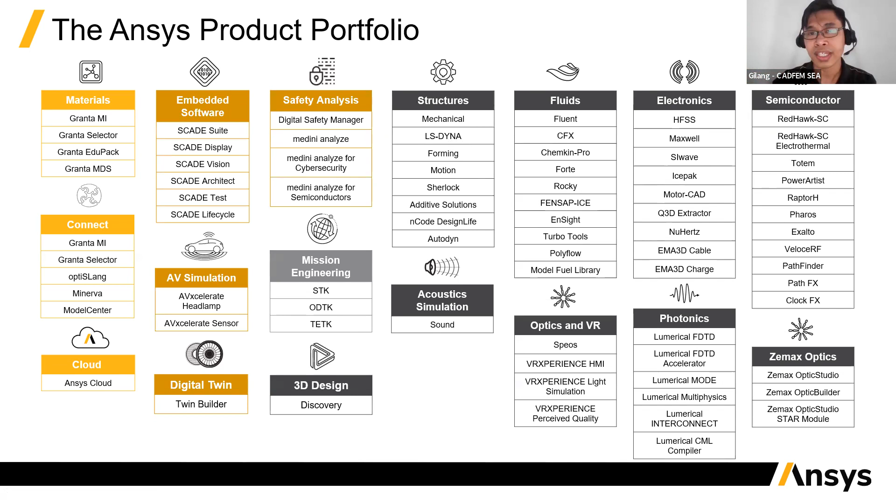Atau kita ingin fokus kepada impact, mobil kita tabrakan, bagaimana safety-nya. Atau seperti yang terakhir kita lakukan ke rekan-rekan di industri bis, untuk rollover, bagaimana kita melakukan analisa untuk rollover-nya. Kira-kira seperti itu, saya coba sedikit lebih detail.

Ini untuk ANSYS Granta. Jadi secara umum untuk lisensi ANSYS terbagi dua, Bapak-Bapak dan Ibu. Ada lisensi akademik, ada lisensi untuk komersial, di mana keduanya terbagi menjadi tergantung segmentasi penggunaannya. Karena memang ada yang hanya untuk level research atau untuk level edukasi saja, sehingga dari segi pricing-nya pun akan sangat jauh dibandingkan yang komersial.

Namun hal tersebut tidak bisa kita gunakan atau bawa ke ranah komersial atau ada tahap kerjasama dengan industri, di mana di bagian industri perlu ada penyesuaian dari sisi lisensinya untuk penggunaan di industri, sehingga ada pembagian proses lisensi seperti ini. Untuk yang komersial ada beberapa jenis: ada Granta MI, ada Granta Selector, dan ada Granta MDS. Sementara untuk yang edukasi, utamanya ada Granta EduPack, dan juga ada Granta Selector untuk yang akademik.

Nanti rekan saya dari teknikal akan coba memberikan presentasi secara demo teknis. Namun mohon izinkan saya untuk coba memberikan brief informasi terkait masalah semua solusi yang ada di ANSYS.

Selanjutnya, di sini ANSYS juga punya product collection seperti ANSYS Minerva, di mana misalkan Bapak melakukan simulasi itu biasanya tidak langsung satu kali jadi, Pak. Biasanya akan ada revisi 1, revisi 2, di mana kalau kita bikin revisi, biasanya kita akan save as, kita jadikan revisi 1, atau kemudian kita save as kembali, kita jadikan revisi kedua. Nah, dengan ANSYS Minerva, kita bisa lakukan scheduling yang pertama.

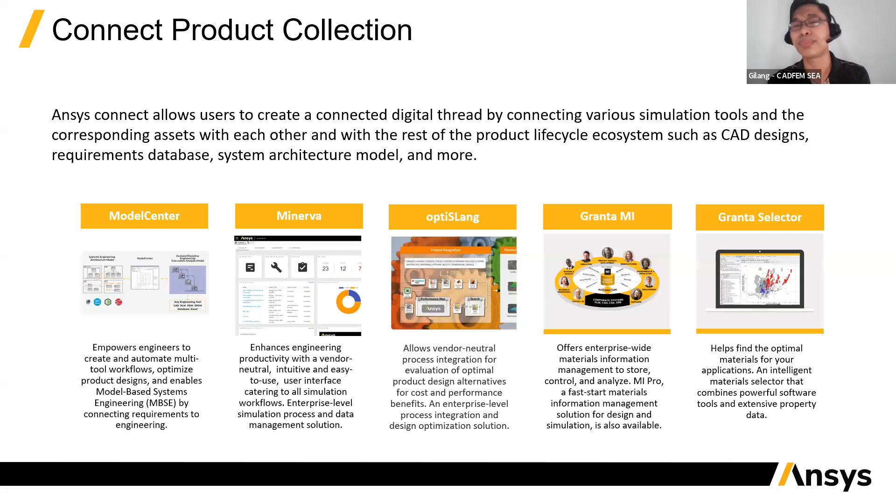Ada juga ANSYS Cloud yang tadi saya bilang, jadi rekan-rekan bisa mendapatkan high performance computing tanpa perlu menggunakan lisensi atau tanpa perlu menggunakan hardware yang rekan-rekan harus sediakan dulu. Cukup dengan akses internet saja dan juga akses token atau akses cloud yang misalkan kita punya. Jadi komputer power-nya itu unlimited, tinggal berapa jam saja yang kita punya untuk bisa akses ke ANSYS Cloud.

Lalu ada embedded software, di mana untuk rekan-rekan yang membuat sistem digitalisasi. Seperti kita buat flowchart, skematik, kemudian kita masuk ke dalam dunia virtual, di mana nantinya kita bisa replikasi beberapa adegan kejadian. Kemudian kita bisa tahu mana yang paling optimal.

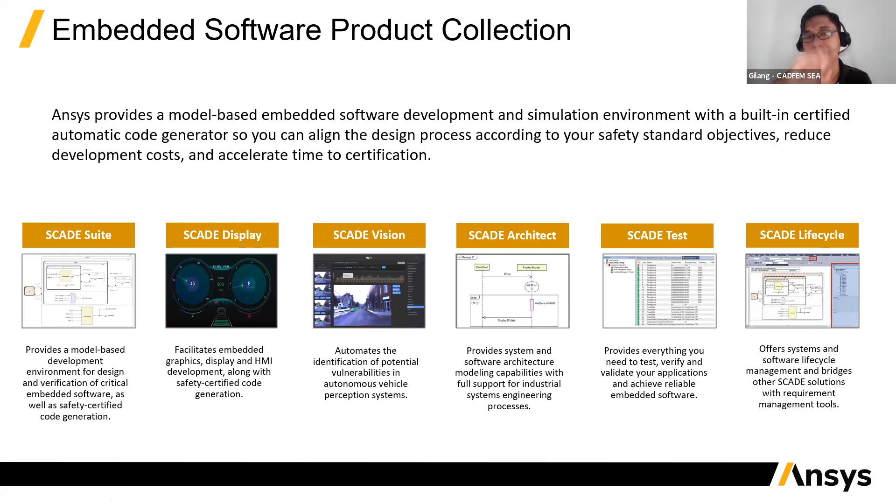Hingga juga misalkan proses electrical. Misalkan kita mendesain listrik, kemudian kita membuat skematiknya, lalu kita ingin melihat bagaimana sebenarnya sistem kelistrikan tersebut kalau kita jalankan.

Lalu juga ada autonomous vehicle seperti tadi. Bedanya, ini kita bisa langsung bikin seperti ada satu kota, seperti yang terakhir saya presentasi bersama rekan-rekan di Jakarta Smart City. Jadi kami ingin mencoba membuat city lebih smart, tidak hanya untuk autonomous vehicle-nya, tapi juga misalkan kita analisa banjir, kita analisa kekuatan angin, apakah akan ada puting beliung dan segala macamnya.

Sampai ke dalam sana pun ANSYS bisa melakukan analisanya. Jadi tidak hanya sekedar menganalisa apakah nanti gempa bumi tersebut ketika terjadi bangunannya hancur atau tidak, atau ketika ada bom meledak kemudian bangunan tersebut hancur atau tidak. Tidak hanya sampai sana saja, tapi sampai ke analisa banjir, itu juga bisa kita coba simulasikan di ANSYS.

Ini juga termasuk yang tadi, namanya digital twin. Jadi semuanya itu termasuk ke dalam product summary-nya di digital twin.

Lalu ada untuk safety-nya juga, di mana kita lebih ke mengatur sistematis pekerjaan, antar scheduling, atau sistem manajerial untuk mengerjakan proyek supaya jadi lebih efisien. Sehingga kalau Bapak punya misalkan jurusan yang bersifat manajemen, seperti misalkan kita menerapkan ISO 26262, itu lebih ke safety atau ke manajemen safety, itu kita bisa menerapkan program-program yang ada di dalam ANSYS, kita satukan ke sana untuk kita buatkan flowchart dan akhirnya kita bisa assign ke orang tertentu.

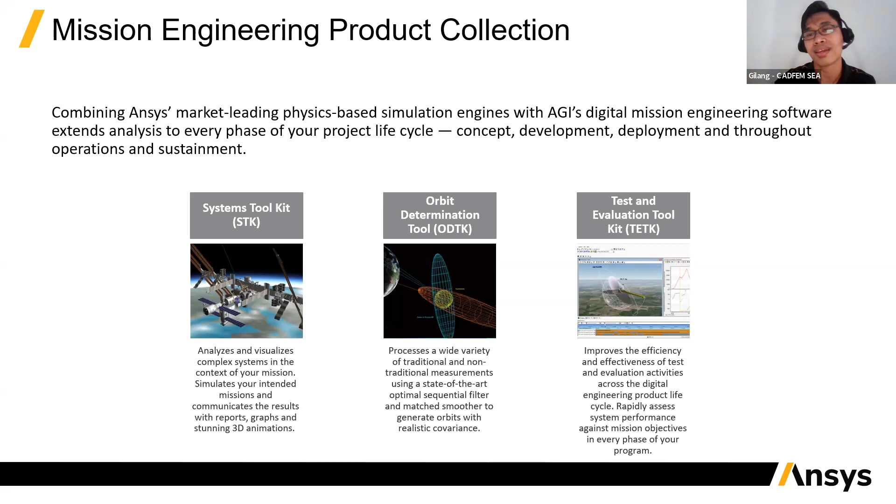Nah, ada juga untuk 3D produknya. Jadi di ANSYS juga ada 3D CAD-nya, ada juga untuk level desainernya. Kita namakan Discovery. Ini berbeda dengan ANSYS Mechanical atau ANSYS CFD pada umumnya. Ruang lingkupnya lebih kecil, namun lebih cepat dan lebih mudah untuk dioperasikan.

Karena kita tidak perlu banyak parameter seperti halnya kita melakukan analisa di ANSYS produk pada umumnya, karena memang levelnya atau targetnya itu ke lebih level designer. Seperti kalau Bapak pernah mencoba SolidWorks, Inventor. Nah, ini adalah sebagai head-to-head-nya dengan mereka.

Namun tidak bisa lebih expert, misalkan ada 2 phase atau 3 phase, atau 3 fasa udara yang kita masukkan, atau misalkan ada beberapa parameter yang lebih kompleks kita masukkan ke dalamnya, tidak bisa. Jadi ada yang namanya ANSYS Discovery di dalamnya.

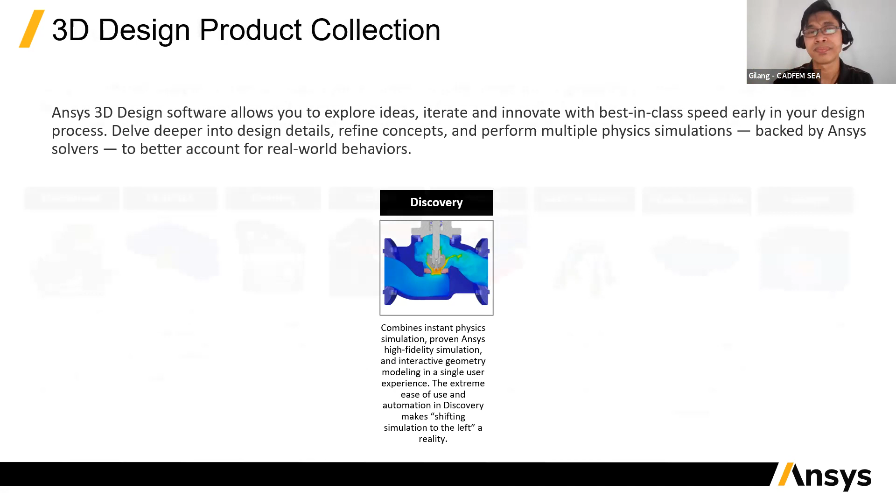Nah, kemudian untuk yang structure, mungkin rekan-rekan sudah mengenalnya. Jadi di ANSYS Finite Element Analysis, itu ada ANSYS Mechanical, ada juga ANSYS LS-DYNA, di mana di LS-DYNA ini lebih terkenal ke eksplisitnya. Seperti misalkan pengurangan material, di mana tidak semua software analisa bisa melakukan proses tersebut.

Contoh misalkan drop test yang memang sangat detail. Atau peluru kita coba lepaskan bagaimana proses peluru tersebut menghancurkan satu benda. Atau misalkan mobil kita tabrakan. Itu juga tidak bisa kita miliki kalau software tersebut tidak memiliki solver bersifat eksplisit.

Yang baru juga ada ANSYS Forming. Mungkin kalau rekan-rekan tahu proses stamping die, atau pembuatan bodi mobil, pintu mobil itu dengan stamping atau dengan press tool. Nah, ANSYS juga ada software untuk menganalisa kerutan dan juga proses analisa spring back pada saat stamping tersebut dilakukan.

Hingga ke motion, contoh mobil kita jalankan, bagaimana roda gigi atau puli dan juga belt itu berjalan, kekuatannya bagaimana, atau kalau dalam kasus contoh yang saya beri lihat, ada ekskavator, bagaimana hidrolik tersebut menggerakkan si lengannya dan juga menarik si bucketnya, apakah nilai dari hidrolik atau nilai dari struktur yang kita lakukan itu kuat atau tidak, ataupun pumpingnya itu kuat atau tidak.

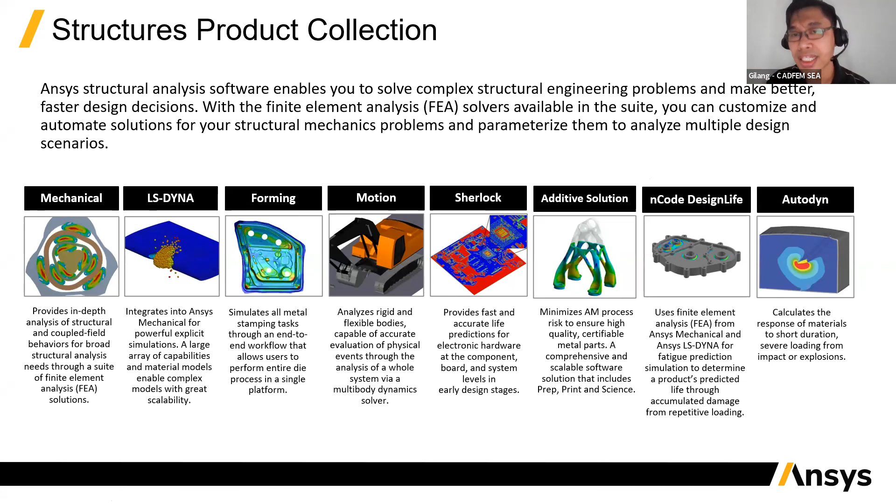Jika memang nanti ada pertanyaan, mohon bisa diketikkan di chat atau bisa potong saya saja, misalkan mau tanya langsung di poin tersebut, tidak apa-apa. Lalu juga ada acoustic simulation yang tadi saya bilang, misalkan ada vibration. Kemudian bagaimana internal natural frequencies tersebut terpengaruh atau tidak sehingga akhirnya ikut bergetar atau tidak dari benda tersebut. Contoh misalkan motor lagi berjalan, mesinnya bergetar.

Kemudian apakah di bagian joknya ikut-ikutan bergetar juga atau mungkin ada peredaman yang bisa kita lakukan di sana sehingga efisiensinya lebih terjadi. Lalu yang paling powerful dari ANSYS itu di bagian fluid atau CFD, Pak, di mana orang banyak kenal ANSYS Fluent. Kalau sekarang sudah tidak ada ANSYS Fluent namanya, Pak, kalau di ANSYS sudah berubah jadi ANSYS CFD. Jadi di dalam ANSYS CFD itu sudah ada ANSYS Fluent, dan juga include ANSYS CFX. CFX ini memang untuk seperti kayak benda yang berputar, Pak, rotational machine.

Lalu ada Chemkin Pro. Chemkin Pro ini untuk penyatuan chemical, Pak, chemical 1 dan chemical 2 kita coba mixing jadinya seperti apa. Forte itu lebih ke pembakaran. Misalkan kita jalankan mobil, bagaimana proses pembakaran pada motor bakarnya.

Lalu yang lagi ngetrend sekarang tuh ANSYS Rocky, Pak. Di mana ANSYS Rocky ini sebenarnya hal yang memang miss dari ANSYS, yaitu di daerah discrete element method, komponen-komponen yang sifatnya intangible seperti misalkan powder atau bubuk, biji besi, kemudian juga pada saat pengeringan jagung, batu bara, kemudian material-material yang memang bisa hancur. Misalkan pada saat dia berjalan, kita coba putar, kemudian ada perpecahan dari material tersebut, itu kita bisa analisa di Rocky.

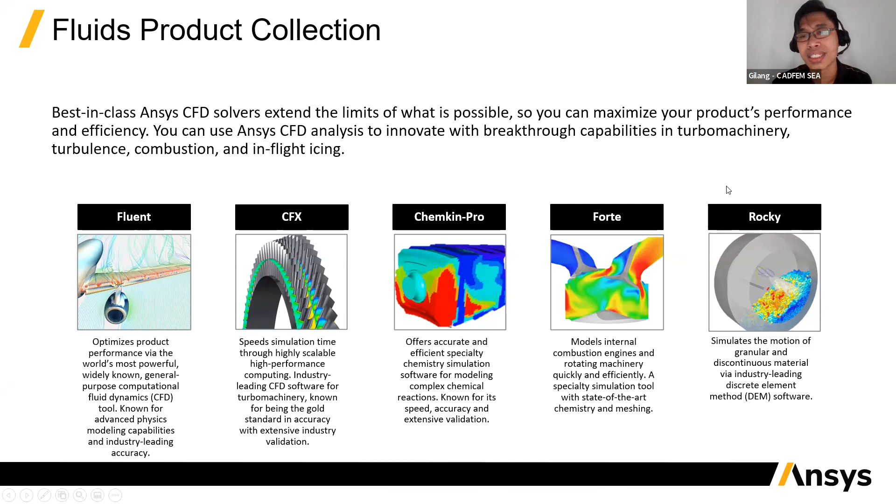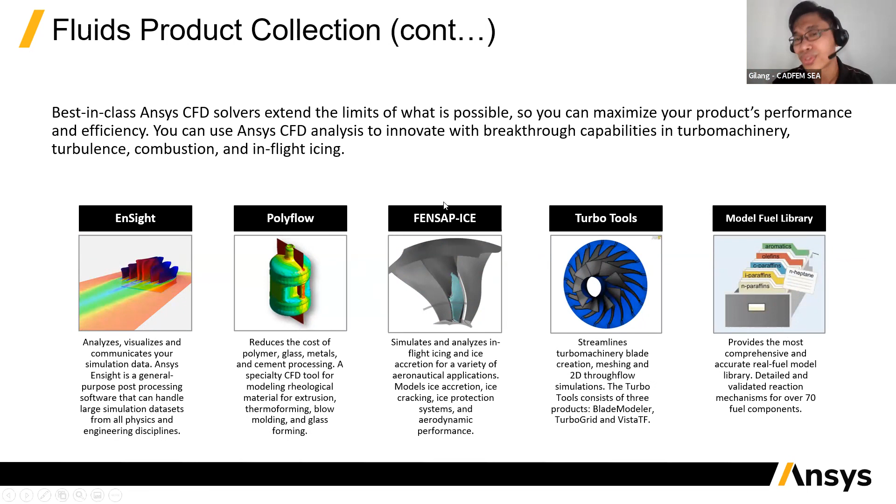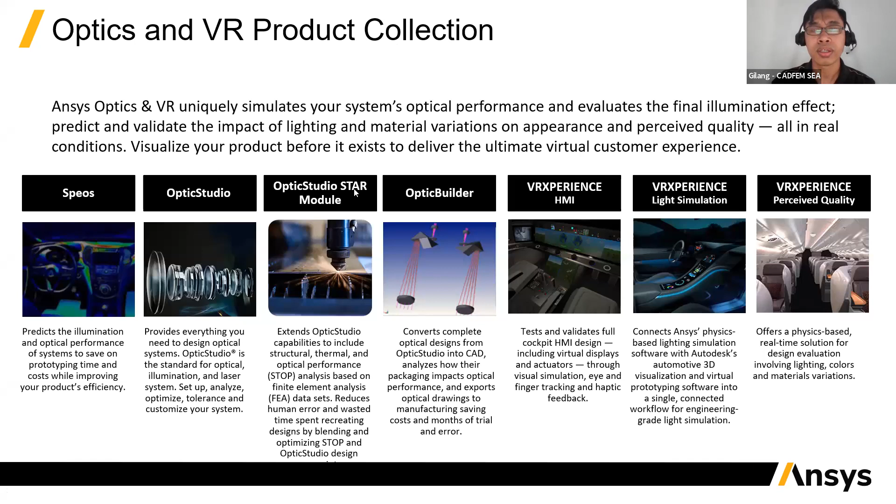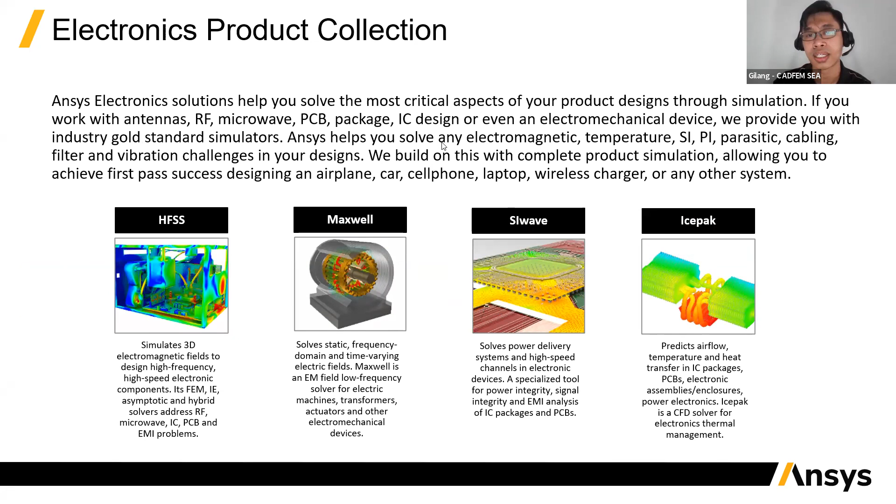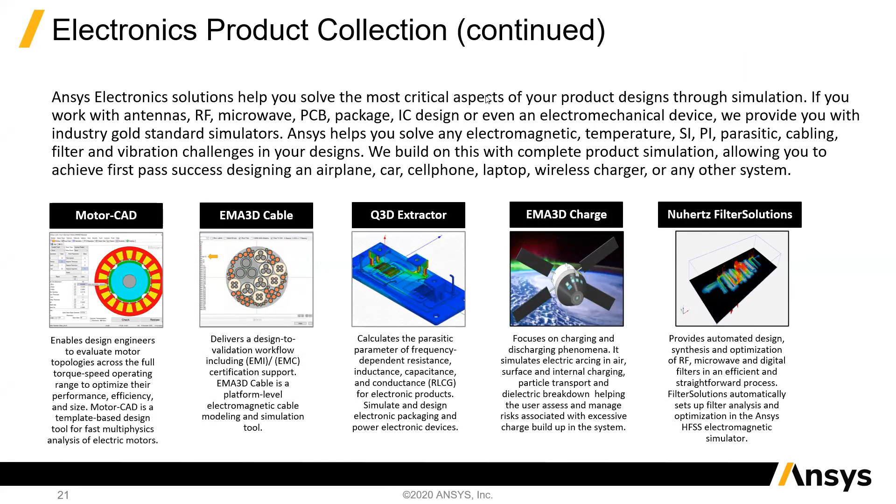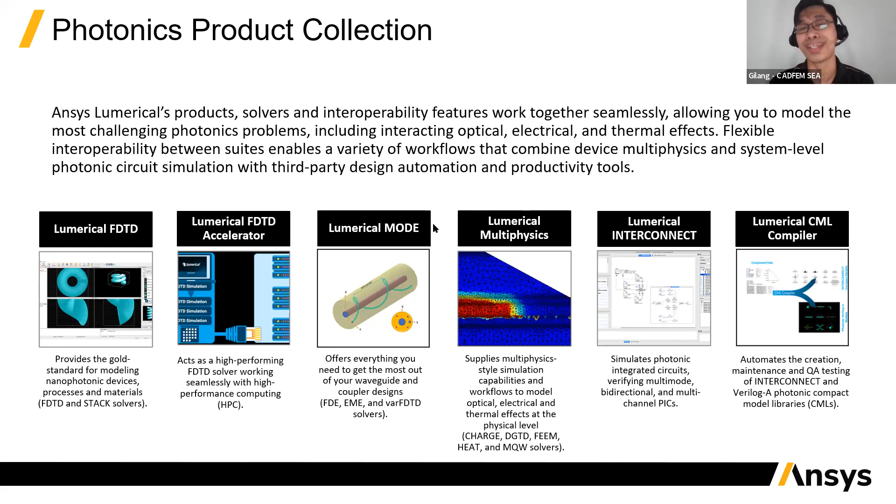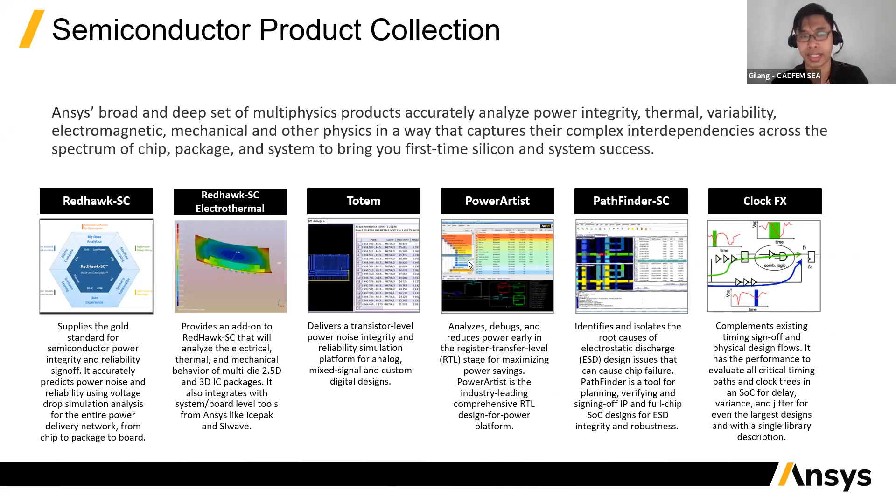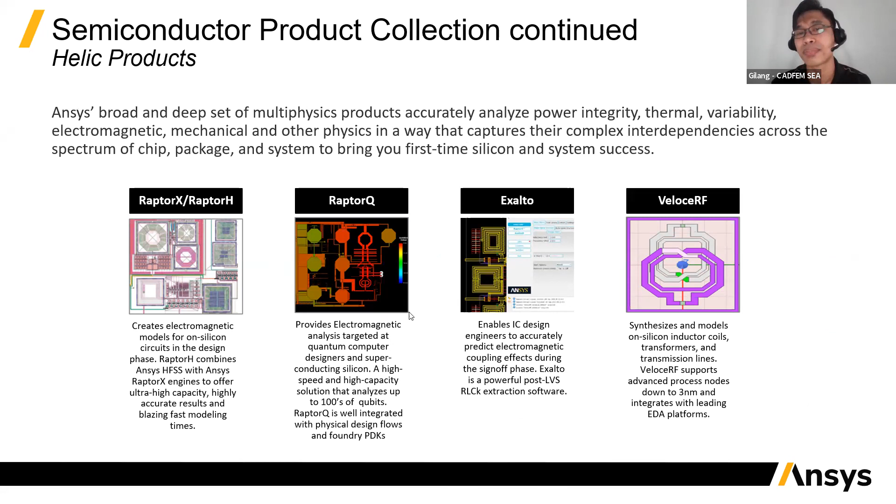Ada semiconductor juga, jadi kalau Bapak desain sistem seperti ini, itu juga bisa kita terapkan dengan ANSYS, seperti namanya ANSYS RedHawk dan juga yang lainnya. Ada Raptor juga, Pak, di sini untuk Helic product, tergantung memang dari jurusannya juga. Kalau misalkan nanti ada yang ingin ditanyakan terkait desain IC, atau power untuk elektromagnetik, itu kita bisa masuk ke dalam semiconductor area di ANSYS.

Kira-kira dari saya seperti itu, kita akan coba mengerucut ke arah ANSYS Granta, dan nanti akan dipresentasikan sama rekan teknikal saya, dan juga nanti kalau sempat akan didemonstrasikan secara teknis. Sampai sini dulu, mungkin dari rekan-rekan ada pertanyaan, silahkan. Tidak ada? Aman semua?

Saya Aman? Boleh, Pak? Boleh, Pak. Silakan, Pak.

Hanya ingin bertanya, nama Syarif Inamul Jawad, dari mahasiswa Tirta. Kalau yang saya baca di website terbarunya ANSYS, ada mengeluarkan produk baru ANSYS 2022 R1.

Yang sebelumnya saya pernah pakai untuk penelitian itu ANSYS 2021 R1. Jadi ada yang 2021 sama yang terbaru 2022. Nah, dari situ, penelitian saya kan tentang carbon nanotube, Pak.

Menurut Bapak, saya melakukan penelitiannya itu lebih baik prepare untuk software yang mana, Pak, yang lebih mantap untuk 2022 atau yang lama? Saya juga ingin tahu apa perbedaannya, Pak. Perbedaan dari dua software itu, yang terbaru sama yang lama.

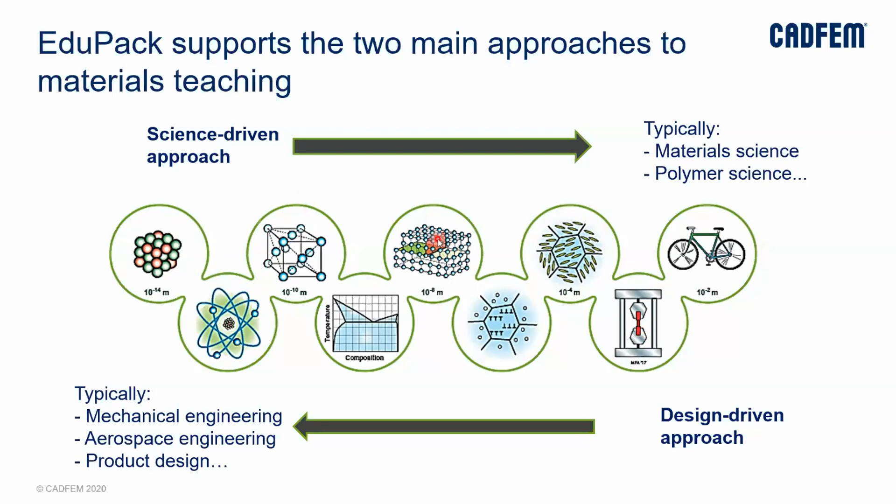For mechanical engineering, aerospace engineering, or product design courses, generally the focus is on what is the final product and what should be the expected material properties, like the expected mechanical properties, and how do we choose the materials accordingly. So these two approaches are handled very well by the Granta EduPack interface.

When it comes to which departments can use EduPack, it's not only restricted to mechanical and aerospace engineering, but there are different databases available for civil related departments, architecture departments, bioengineering departments, manufacturing, material science, and eco design. So there are many databases addressing each of these aspects, taking into account eco properties like carbon footprint and energy consumption for manufacturing, and sustainability related properties are also available, with a specific database which I would show during the demonstration.

It can basically be used for all 4 years of undergraduate education. There are different levels available, suitable for different undergraduate levels. Currently, it's being used across the globe by more than 1,400 institutions across 70 plus countries, spread across Asia, Europe, and Southeast Asia as well.

So how does Granta EduPack support introductory courses? There are useful and eye-catchy images for inspiration and engagement for students. Pictorial images can help students remember the materials, like Lego blocks are made up of plastics, jet engine blades are generally made up of titanium, and the materials for solar cells, photovoltaic cells. So there is a pictorial representation supporting the students to remember the materials.

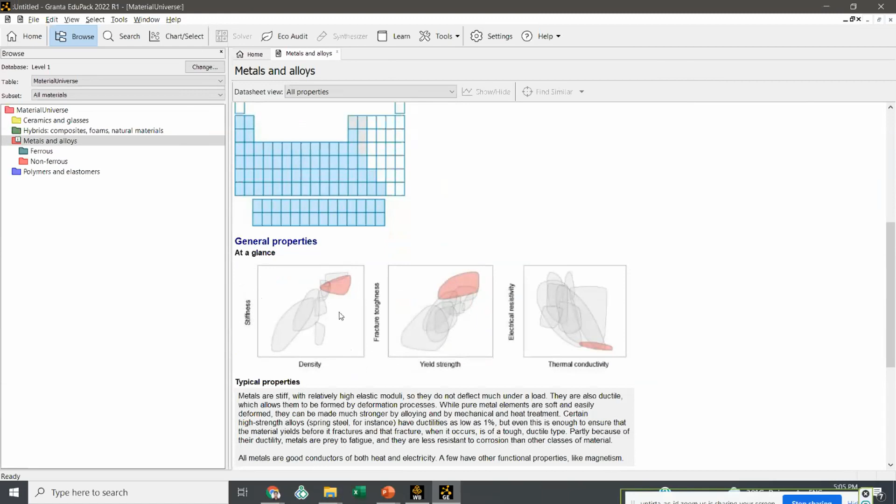Same thing for other properties, it just gives you a glimpse about the general properties, typical properties, and the failure mechanisms - how these materials fail, whether it's fracture, ductile fracture, necking, or brittle fracture. These are also shown, along with typical manufacturing processes like casting, forging, additive manufacturing - a general introduction of the typical processes, and typical uses are also given here.

So if you go on to the further subclassification, ferrous, and you go on to the particular data sheet - this is one particular alloy, cast iron, ductile in nature. Here we see images of the automobile crankshaft and the gears, and the caption describes the images.

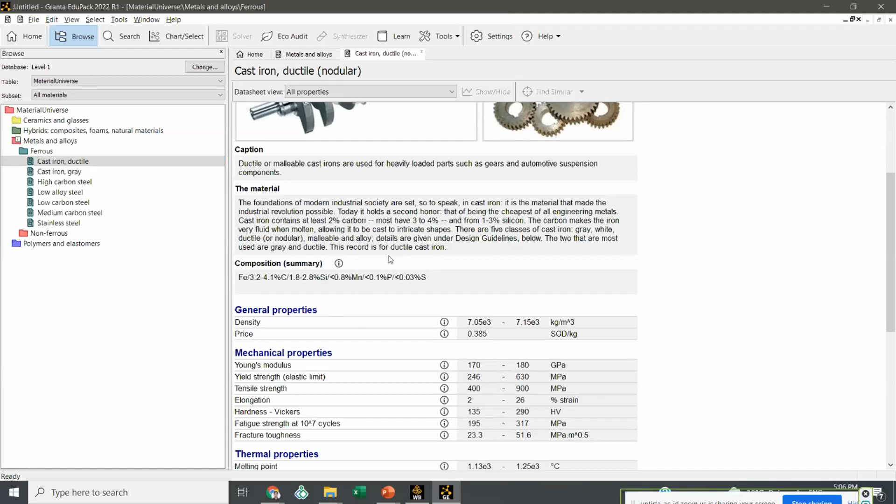The composition of this particular alloy is shown here: how much iron, carbon, silicon, manganese, phosphorus, sulfur - the ratio of the composition is shown. The material overview is given, coming to the properties. We generally have general properties including density and price, and you can change the price units based on your region.

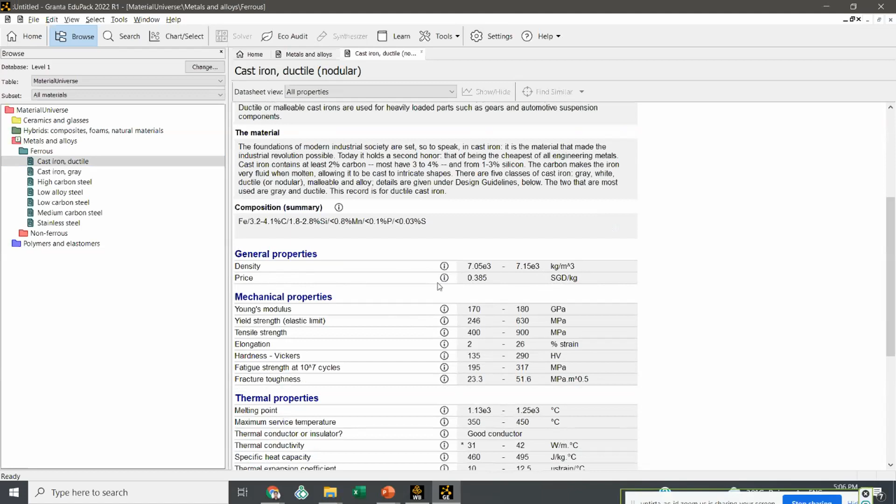Also here we get to see the mechanical properties like Young's modulus, yield strength, tensile strength, its elongation percentage in percentage strain, and other mechanical properties, thermal properties, electrical, optical properties, and also eco properties.

This is showing how much is the energy consumption for the primary production of this particular material. It uses around 30 to 34 megajoules of energy per kg to produce this particular cast iron metal alloy, basically from the ore itself. And then how much is the carbon footprint for this primary production - it's around 2.26 to 2.49 kg of carbon produced per kg of the alloy itself.

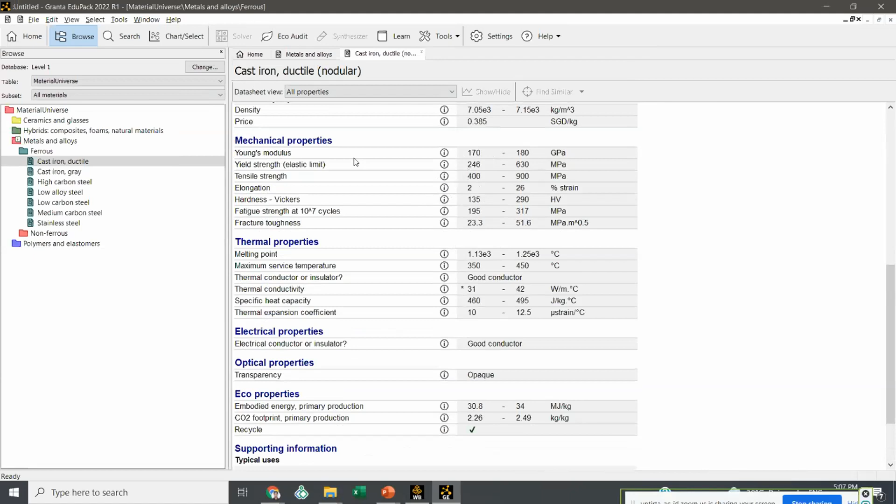So this is all a range. You get to see the range of materials because there can be different compositions available here, so the exact range is shown.

At the bottom, you get to see the links for the process universe. When you click on this, the material manufacturing processes applicable for this particular material can be visualized as well - you can do joining by using adhesives or fasteners like bolts, rivets, or join them by welding with metals, and then additive manufacturing, casting, machining, and surface treatment. Different processes that are possible with this particular material are also shown here.

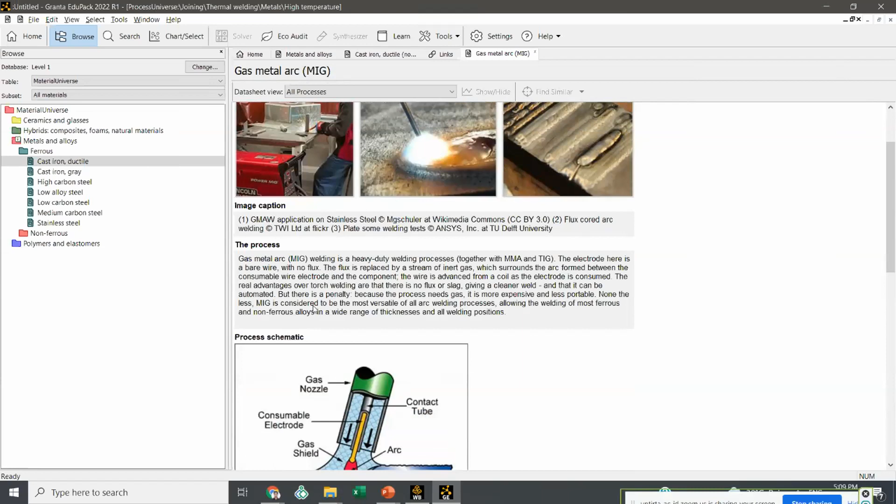Here you can see for a particular manufacturing process, it is also supported with imagery, pictorial images - the welding process, gas metal arc, or in short, it's called MIG welding. The principle followed in the welding process is given an overview here, so students will understand what MIG welding is. The process schematic is shown here, and other information as well.

Compatibility with materials, function compatibility - whether it is electrically conductive, thermally conductive - this information is also shared, along with the joint geometries: what types of joints can be welded using this particular welding process. And in terms of economic compatibility, how much is the tooling cost, equipment, and labor cost - it just gives a range of that.

And suppose you don't understand a particular entry - what does it mean by electrically conductive? If the student does not understand, they can click on this 'i' symbol and read the definition, to see what is meant by functional compatibility. An overview is shown, and for further reading, a reference is also given - the book, the author, and the chapter number, so they can go and read for their own knowledge.

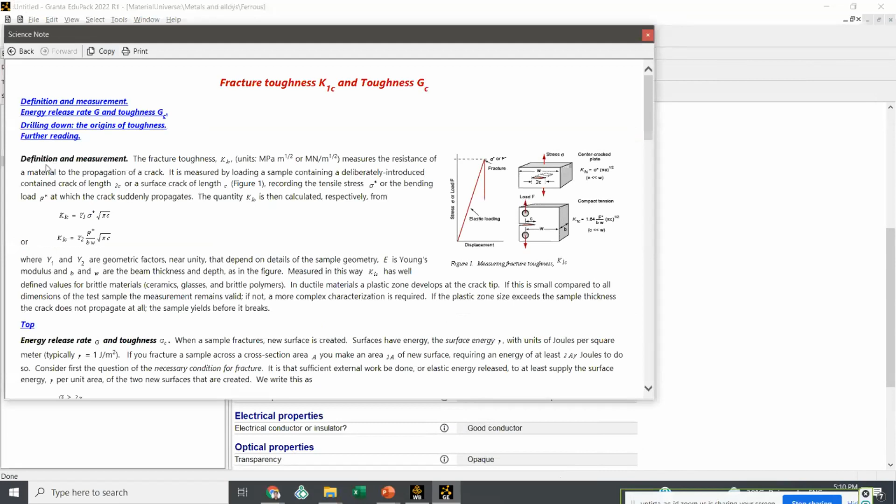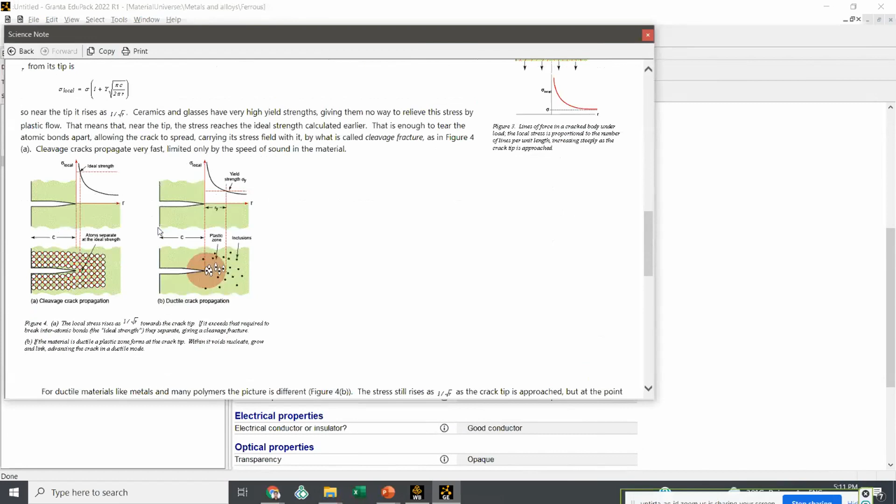This is available for all manufacturing processes, and also even for the properties as well. If the student does not know what fracture toughness is, they can click on this and see the definition here - a detailed explanation, in a crisp manner, along with additional references. You have multiple references with chapter numbers mentioned for further reading for students.

So this is basically about the browse tool. And for the search tool, suppose for example we are searching for a particular material, Teflon.

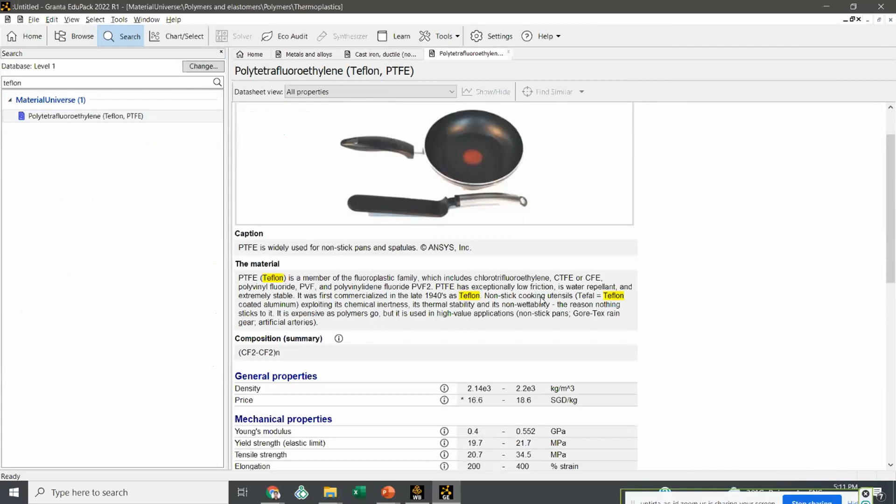So we get to see the students can just try to search for that particular keyword, and we get to see that it's being used in kitchen utensils, for what it is used for non-stick application. So they get to know from this explanation, and information about its properties are available here.

And in terms of its recycle mark, what is the number that is assigned for this Teflon, and you can get to see what is its industry or chemical name, polytetrafluoroethylene.

Then we come to the chart or select tool. So let me create it from scratch. It would be better to explain this with an example here. So suppose, for example, the project is that we have to do a simple material selection for an aircraft wing spar.

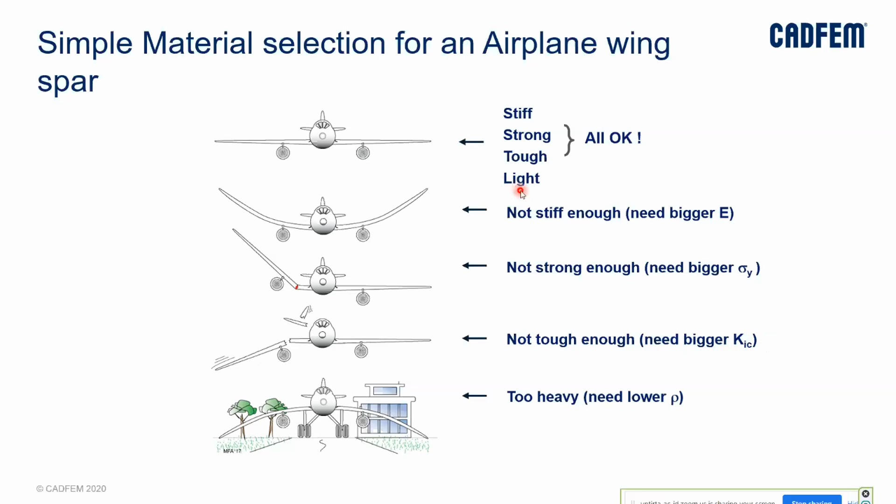So there are some design requirements, that the wing needs to be stiff, strong, tough, and light. Stiff means it needs to have a higher Young's modulus. Strong means it needs to have higher yield strength. Tough means it needs to have a higher fracture toughness. Light means it needs to be having lower density. So I will demonstrate how we can choose material for this aircraft wing spar.

So firstly, we choose the level 1 database here. We just go into the database. So first thing is we need to have strong and stiff material. So I just click on this chart. I'm going to plot a bubble chart, or an Ashby chart.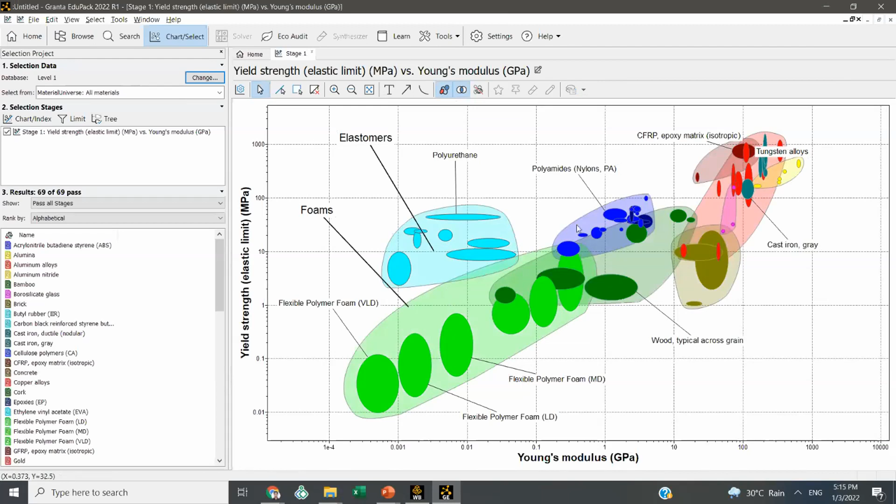So identification of materials, labeling them is possible, and then you can show the family envelopes. So all these green ones are foams, these are elastomers, these are polymers, natural materials, non-technical ceramics, metals, alloys, composites, and technical ceramics. So a family of materials can be plotted, and what materials are available in them can also be plotted. You can toggle them as well here.

So here, what we want is materials with high strength and stiffness, so that's somewhere here in the top region, right? So we just take a box selection. I make a box here from here to here. So these are materials with high strength and high Young's modulus, and I just say auto scale.

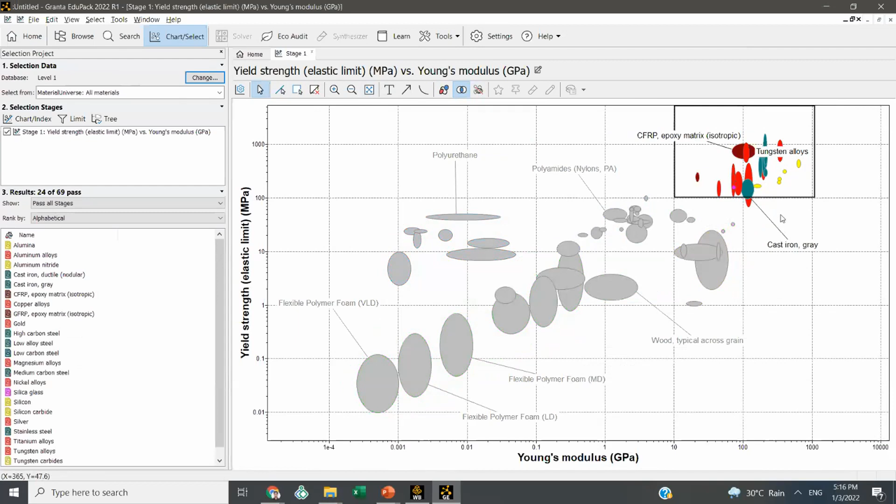I just need to say these are all grayed out because they are out of the box. So now I just say hide failed records and then auto scale. So these materials will be zoomed, and I get to see what are these materials that are available.

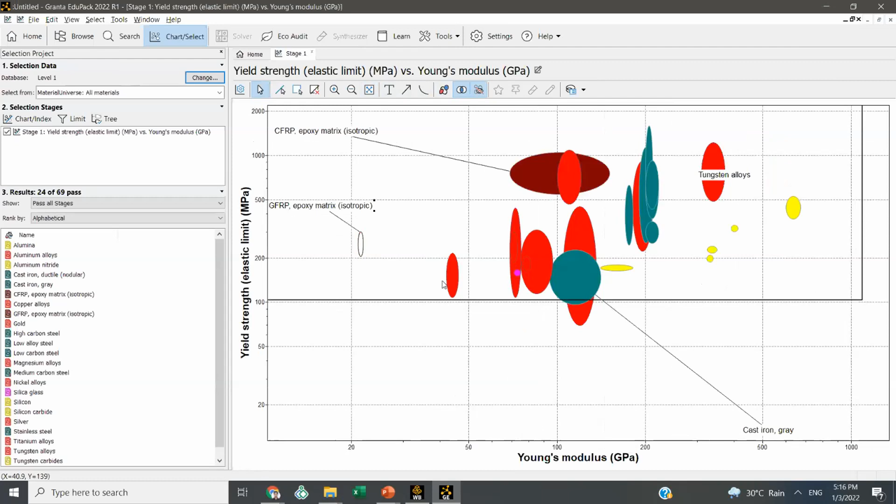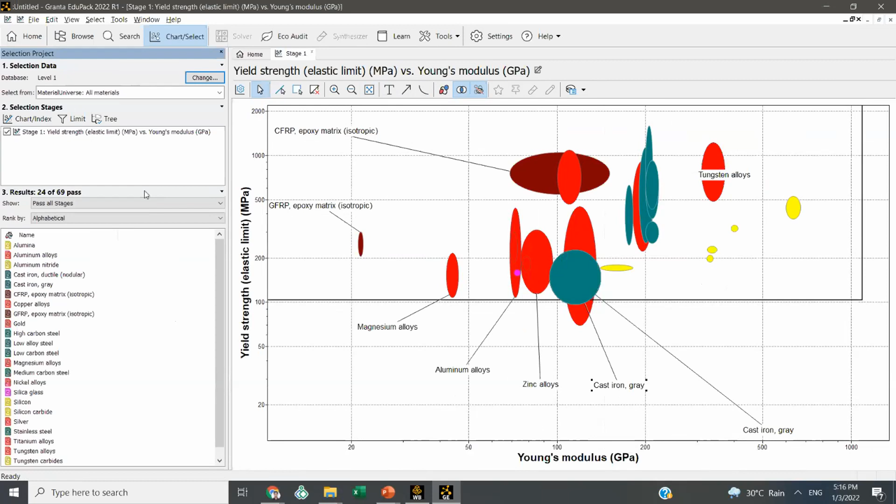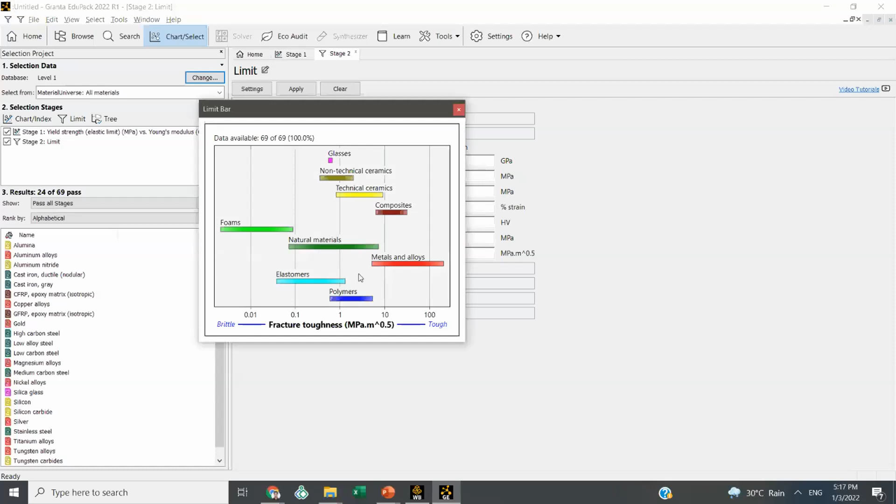So this is one aspect, and the second aspect is to define the fracture toughness. We want a tough material, so cracking does not happen. So we click on this limit, go to mechanical properties, and give a fracture toughness of 15. This basically gives an estimate of the material's fracture toughness or cracking behavior.

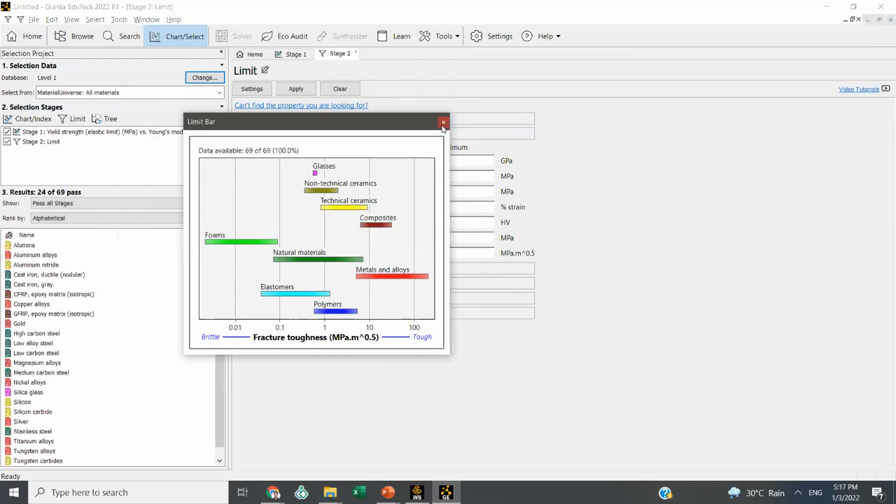If you don't know what value to enter here, you can get that reference from here. If you click on this icon, you get to see which material you're looking at. Currently for aircraft materials, we're typically looking at metals and alloys, so it's around 10 to 100 range. We give a higher value of 15 here to make sure the fracture toughness is above that value, and I say apply. Once we do that, the next aspect is the cost and the density.

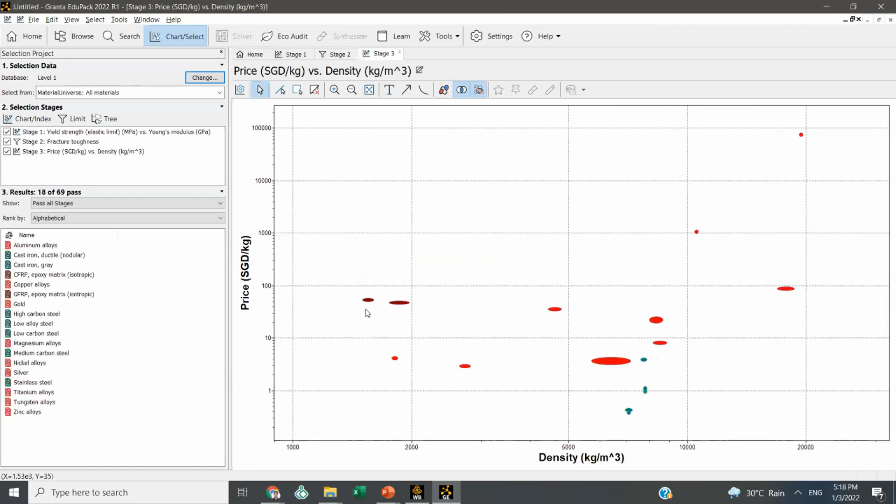So for that, I click on the chart again. On the y-axis, I go to general properties and show the price, and on the x-axis, I show the density, and say okay. Now another list of materials are also grayed out, which we can see here. Let me just hide them and then auto scale now. So here we get to see the distribution of price versus density.

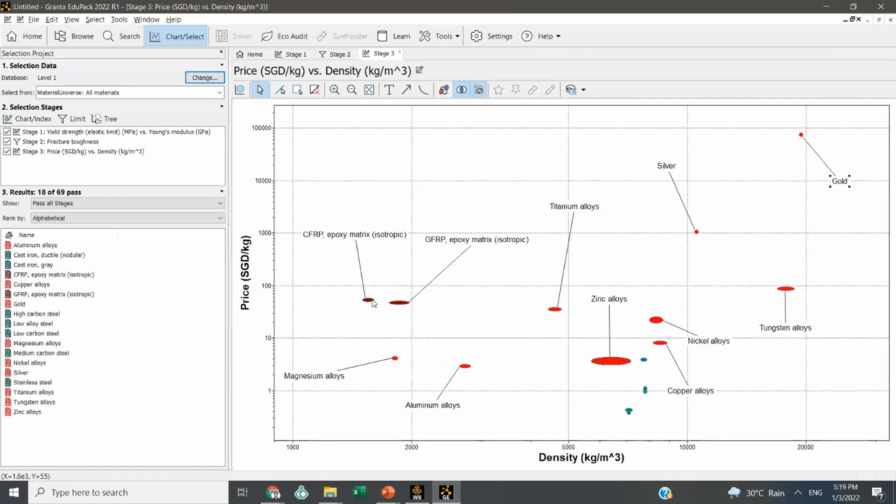Tungsten, gold, silver. So now, giving an overview about the materials, we want to choose materials which are cheap and lighter in weight. If you see gold, it's costly and heavier in weight, so it's not suitable for aircraft application. So we are looking at somewhere here. Potential choices include aluminum alloys or CFRP, GFRP composites. We can go with aluminum alloys, which is a cheaper option compared to CFRP. So when we open it, the appropriate material properties can be chosen, and also we get some validation from the images here as well. This is just a sample demonstration about this chart and select tool.

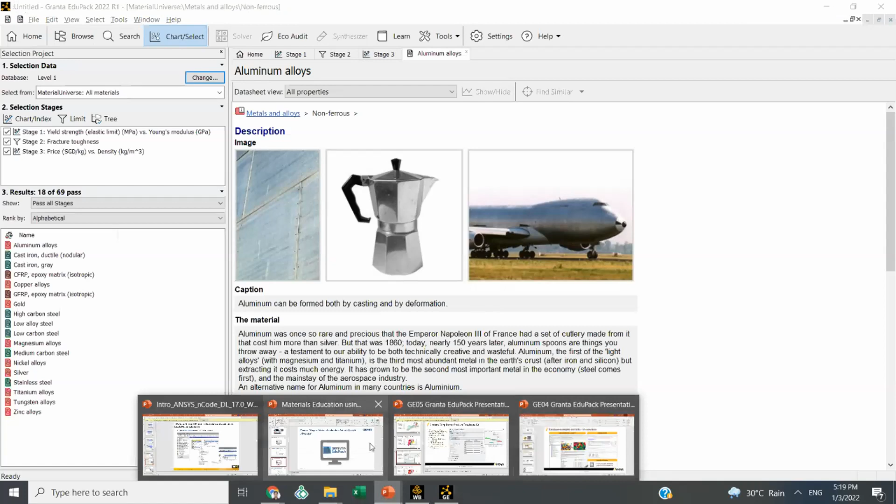There is also the Eco Audit tool, which introduces students to life cycle thinking, and the impact of products in terms of two aspects: carbon footprint and energy consumption. This cycle shows the life cycle of any material, starting from natural resources to material production, refining the ores to find pure metals, manufacturing the product, using the product, and end of the product, whether it's being recycled, re-engineered or reused. If none of those three happen, it goes as waste, either burnt or into landfill.

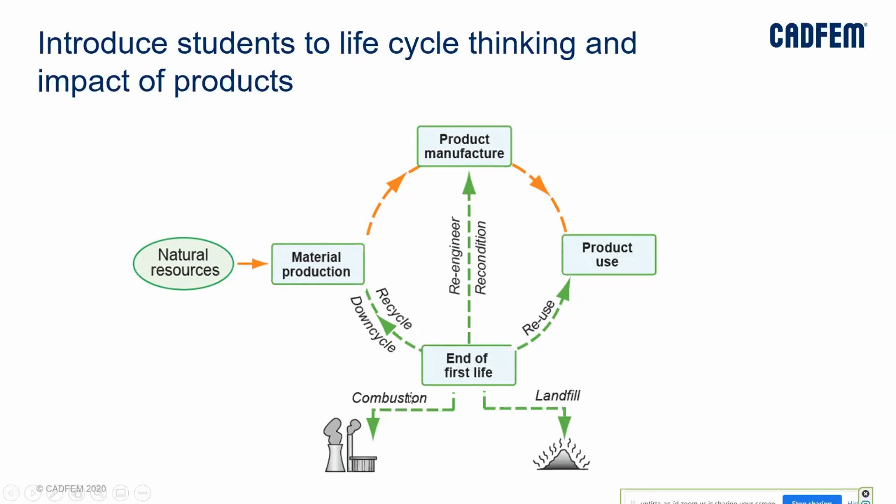So these eco audit or life cycle analyses can be performed inside EduPack. A life cycle analysis is a very detailed subject generally taught in masters programs, where they define a goal and scope for a particular product - the system of analysis, the inventories being used, and impact assessment details like ozone depletion potential and global warming potential. These are complex analyses that can be done. Inside EduPack, it's much more simplified for students - a fast, streamlined life cycle analysis with sufficient precision to guide decision making.

So it has 4 life phases and 1 transportation phase. We'll see what those are in the next slide. We can calculate how much energy consumption there is for that particular material or product manufacturing, and then carbon footprint.

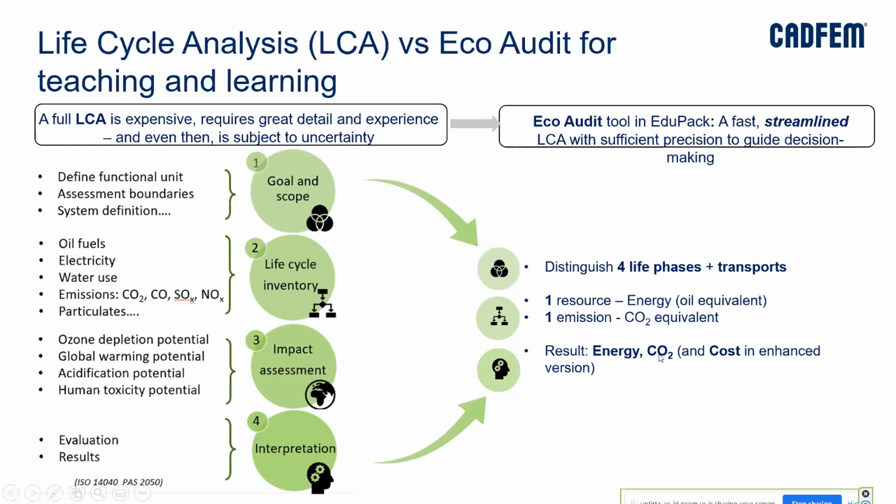So, for example, let's take a single-use plastic water bottle. With this Eco Audit tool, you can define how many water bottles, how many caps you want to manufacture, what material you want to use for them, whether it's recycled content or virgin newly made content, how much is its weight, and what manufacturing process it will be subjected to - is it molding, injection molding, forging or casting. You need to define that here.

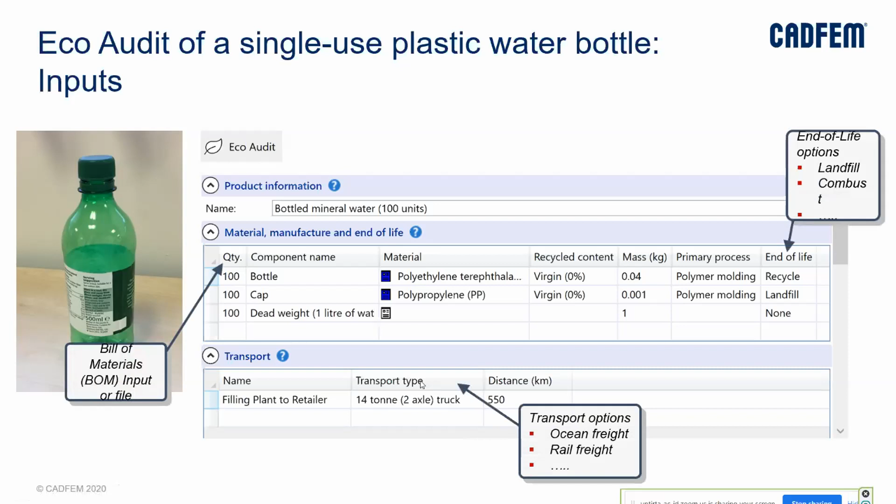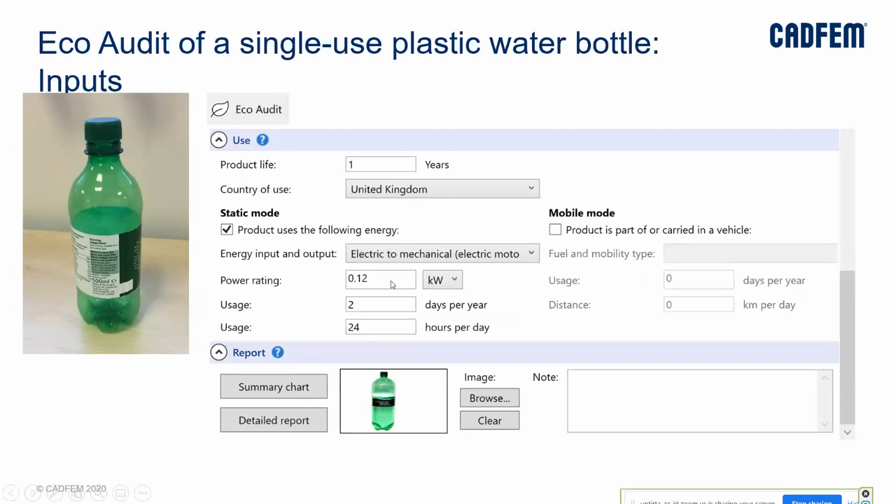And end of life - so when we mention this, it takes these inputs, along with transportation details. These bottles will be transported from the industrial plant factory to the retailer, so what is the transportation type and distance. Based on that, it also calculates how much energy consumption in terms of fuel will be used, and based on this data, also additional energy consumption during usage. Suppose in this application, cooling of the water bottle will be performed, so the power ratings for refrigeration are mentioned here, and you get to see the chart of energy consumption and carbon footprint.

As you can see here, during the material manufacturing stage, around 320 megajoules of energy is consumed - manufacturing stage for the bottle, transportation, use, and disposal. So the energy consumed in the different phases is shown here - 5 phases including transportation, and the end of life potential, whether it can be reused or recycled - if it's negative, that means it's not possible. Similarly, the carbon footprint in terms of how much carbon dioxide will be produced in kg for the different phases is also shown here.

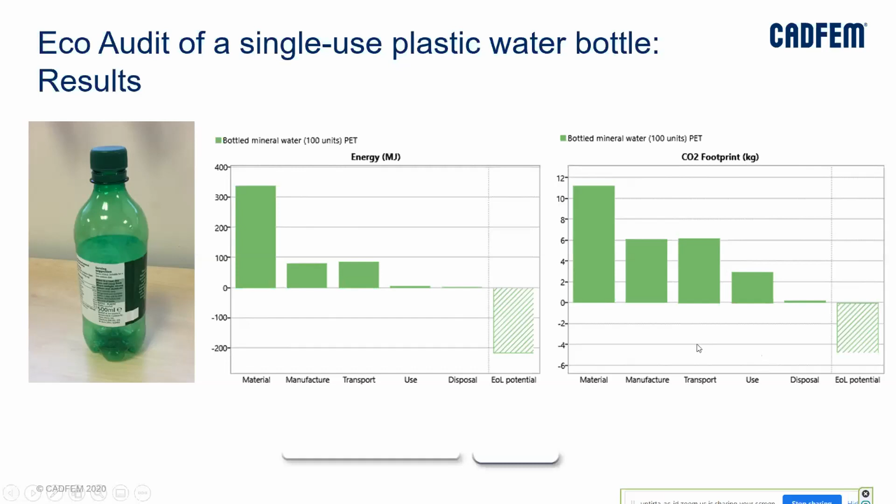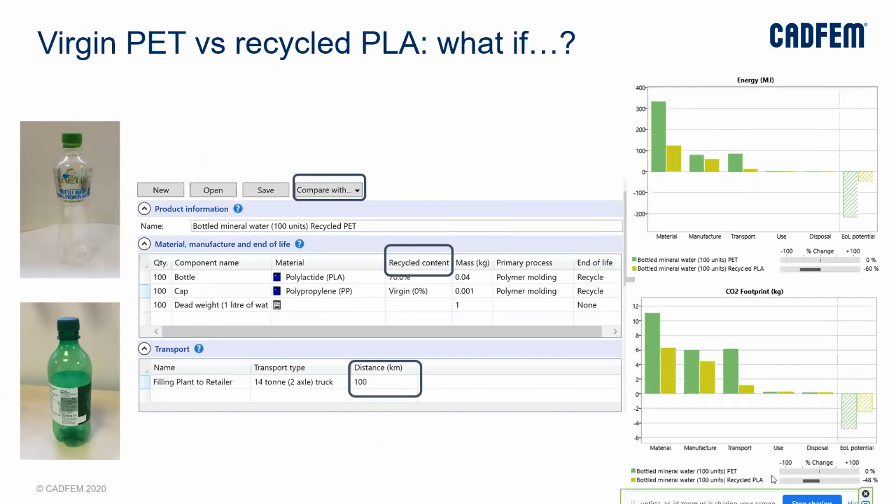So I think that's a quick overview about the eco-audit interface. Yeah, before I continue, any questions so far from the team?

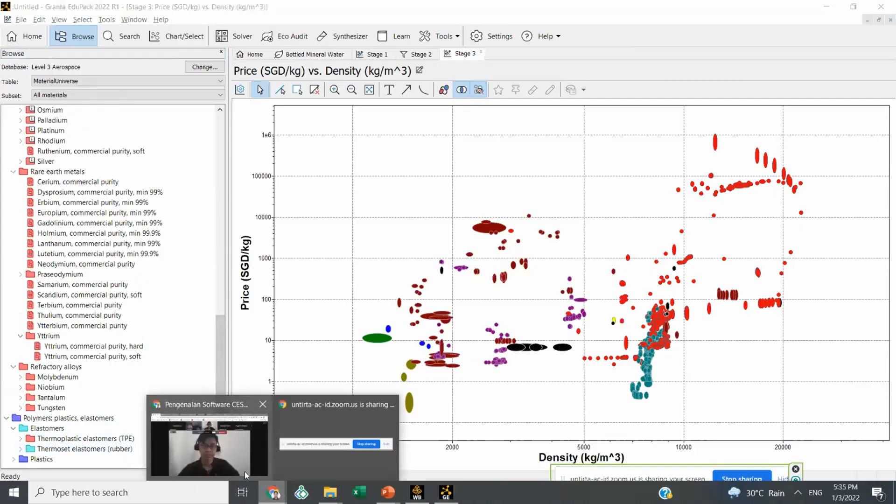Does that answer your question? Yes, thank you. So for this academic version, is it free?

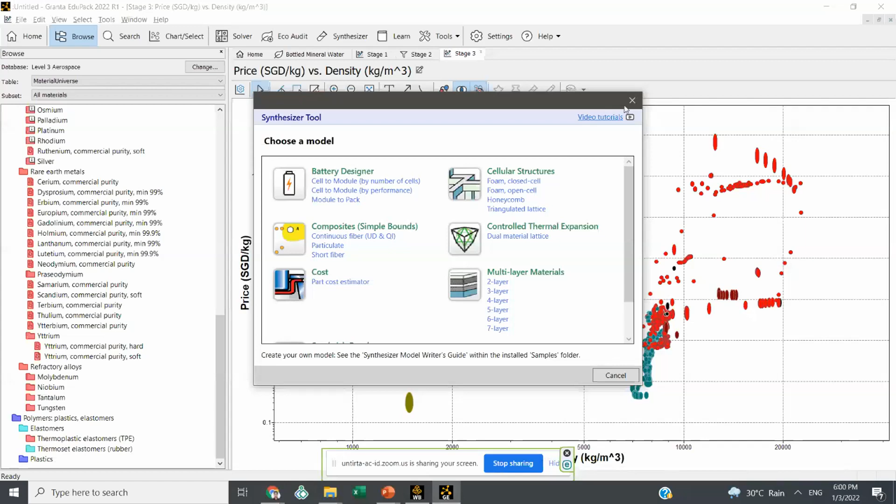Okay, so when it comes to composites, if you see these aerospace materials, the hybrid materials is the composites one. Here, different types of composite material databases are available for ceramic matrix, metal matrix, natural material composites, or polymer matrix composites. So a very extensive database of material cards for composites are also available here.

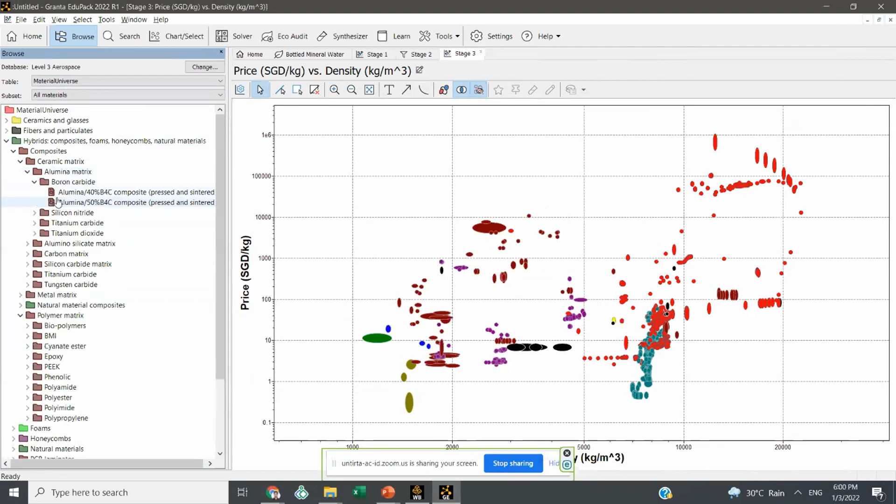So if you just look here, this is having alumina, 40% B4C composite, which is pressed and sintered. So basically you can see the matrix. Composite is made up of the matrix, which is alumina in this case, and the fiber is boron carbide reinforcement. And the volume fraction of fiber is 40% fiber and 60% resin. And here you get to see the composition summary, the price, physical properties, the mechanical properties, impact factor, thermal. So all these properties are also available.

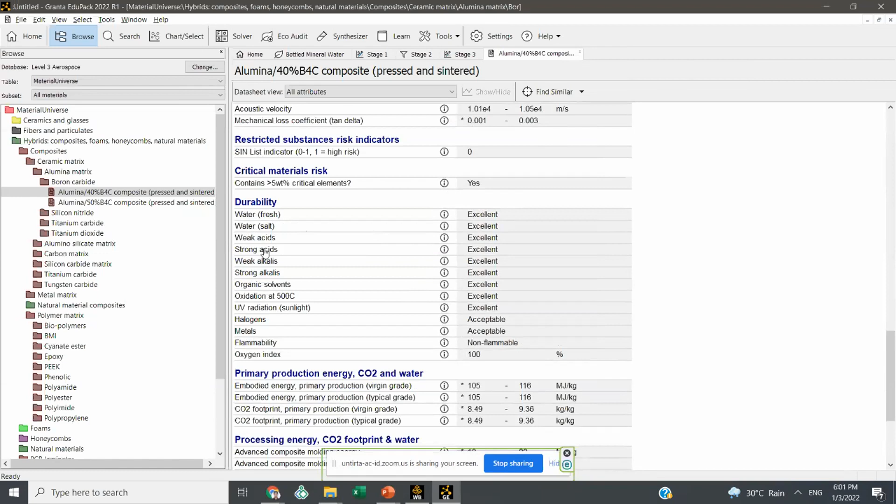Durability properties also, how does it react with water, is it good or bad, acceptable, and so on. So those aspects, carbon footprint, energy consumption data. So these are all information available with respect to composites.

There's a synthesizer tool as well where you can create your own composite material. So you can just define the matrix material. You can browse for a matrix material here. Say suppose we choose high strength glass fiber matrix here. Okay, it's for the matrix, right? So we can choose some metals as well here in terms of matrix.

So let's go to alloy steels, and for fibers we can go to these natural fibers like say banana fiber. So you can create your own unique model, carbon fiber model here. So you can just define the model variables here, how much is the fiber volume fraction range, and give a name for the matrix and the fiber here.

So for matrix, you just use the same reference also. Okay, the matrix is matrix. So it would create a new record with the material composition for this particular composite. So you can create the same for particulate and short fiber composites also like this. So around 6 material models can be created here, and multi-layer materials also can be created here. Like if you want to create a multi-layer laminate with around n layers, you can define material for each, and we can calculate the equivalent material properties for such composite materials.

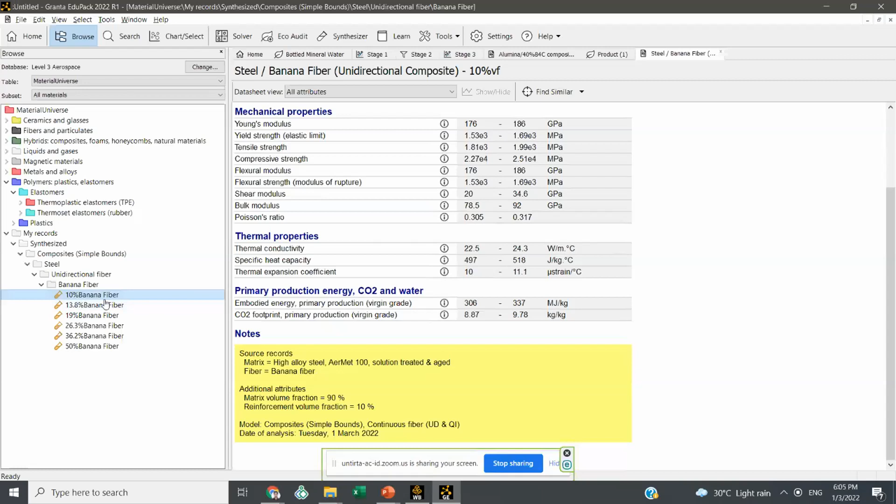So here we are mentioning this range. We have a choice of mentioning range, 10 to 50%, and the number of values we show here, so it's 10... you see around six values. It just divides it basically. Whatever range you mention, it will be divided here.

So this record naming is what I mentioned, the banana fiber and steel. It's just showing here as those folders. Fundamentally we get to see these mechanical and thermal properties, and in addition, the CO2, the carbon footprint, and the energy consumption. The cost also, which is critical here. Similarly, it can be done for multi-layer materials also. These two are kind of under composite material fabrication. Synthesizer tool helps to do that.

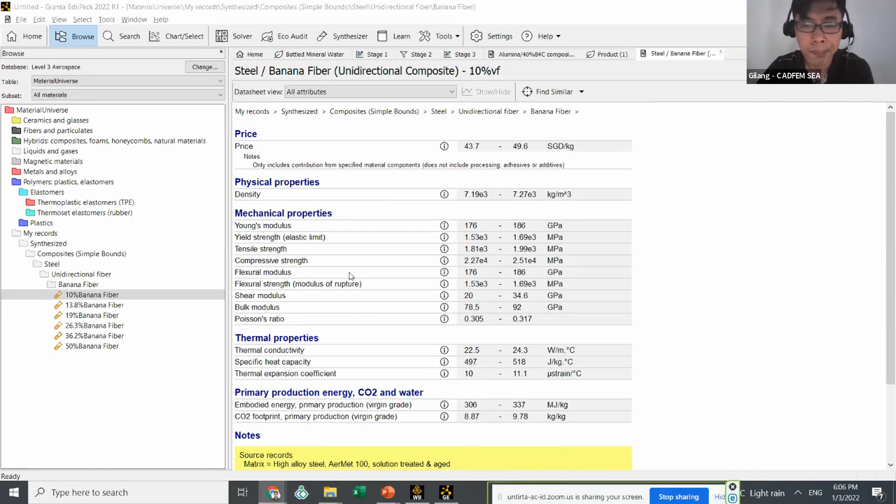Okay, Shakti, thank you very much. Sure, yeah, in addition, just a quick one. Additional advanced features and tools are also available. I wanted to highlight that also.

So suppose we want to know what is a similar material for this particular aluminium commercial purity alloy. We want to find similar materials for that particular alloy. We can use this, say find similar, and it shows the nearness ratio. This is the reference material, you see like a pin here. Other materials, how close they are, is shown here. So it's 97% close, 96% close. You can choose these and create a comparison.

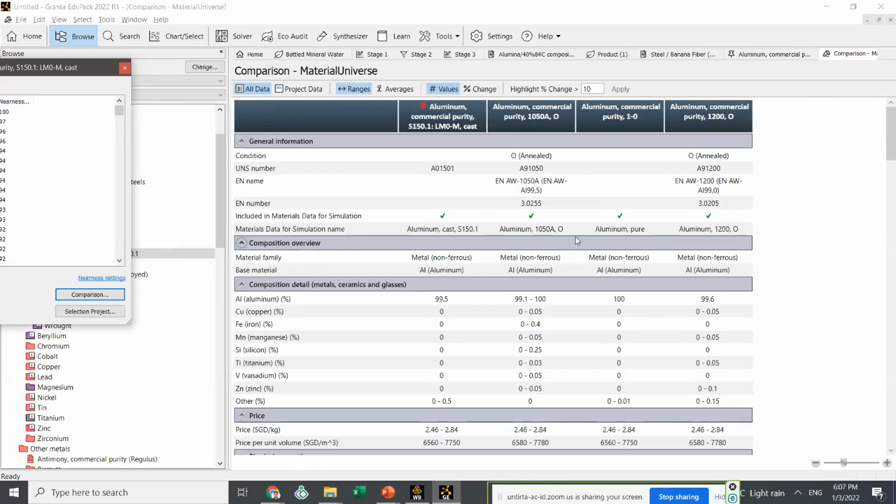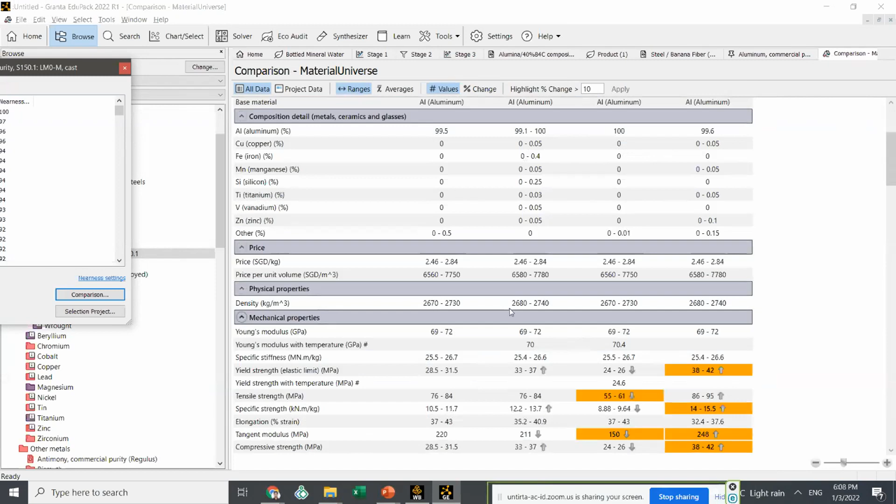It's going to show these materials side by side here, and wherever there is a huge difference in the properties, it's going to show it with an orange highlight. By doing this, you can find suitable equivalent or alternative materials that can be replaced. If you're choosing a cheaper option, we can find alternative cheap materials with similar mechanical properties or thermal properties. So this is a useful tool on that front.

I just wanted to highlight that one, Gilang. And exporting material properties is also possible. If you want to export the material card, you can export it to ANSYS Discovery, ANSYS Workbench, all the simulation interfaces - we can export it as well. So that's also possible.